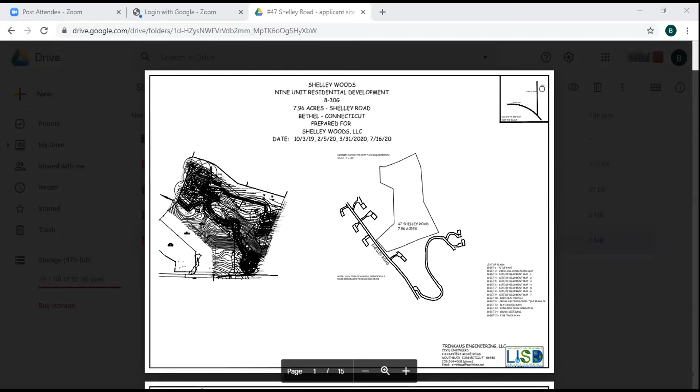Are these coming through on everyone's screen? Not yet. There we go. Okay, probably I would say, David, keep scrolling - I'll tell you when to stop. We just want the one that's really at the top of the hill, so keep going. That one you could stop at, this sheet. Okay, so just scroll down a little bit, David, or actually scroll up, so that the septic is at the bottom edge but the parking area is shown.

Okay, that's good. So the area that is Unit A is shown at the bottom left of the screen. Unit B is directly north of that, and then C and D are at the top of the page - you see half of building D.

So the 7,300 square feet of available area to turn around any type of vehicle, whether it's a fire truck, a UPS truck, or a garbage truck, is outside the parking spaces in front of the units and down to a line just at the upper edge of the dumpster across the driveway.

So dimensionally, from the front of building A, the parking island basically all the way over to the parking space in front of building D, which would be space number 16 on the plan, is 102 feet. If we go from building A to building C, which is in the upper left just off the page, that distance is 113 feet.

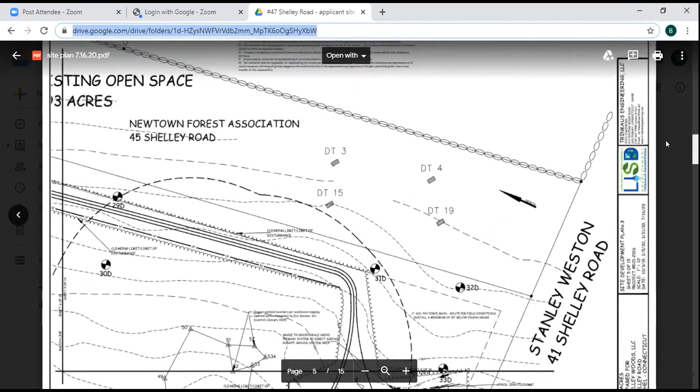We showed that we have at least 250 feet from that—so it was a field-measured sight distance, not a measured distance on a plan. Additionally, the traffic engineers say it should be measured 15 feet back because that's a DOT standard, but Shelley Road is not a DOT road. It's commonly used for residential driveways that we measure a 10-foot distance back from the edge of the travel lane, or if the road had a white line as a shoulder, you measure back not from the edge of pavement but from the edge of the traveled lane.

But again, Shelley Road has a 25 mile-per-hour speed limit, so 10 times the speed limit is 250 feet. They talk about using the 85th percentile speed—that would generally apply if you have traffic monitoring devices, and that's usually found on DOT roads where they count vehicles and speed. In many cases, the 85th percentile is higher than the posted limit.

I know on a site I had in Bridgewater on Route 67, the posted speed limit, I believe, is 45. The 85th percentile was actually 58 miles an hour, so the sight distance was based on 10 times that value. But here, again, we have a dead end road, we're almost at the dead end of it. 250 feet is more than adequate. And that's the minimum—you can actually see farther than that, but we demonstrated that we have the minimum sight distance as far as that goes.

Regarding Todd's comments, as I pointed out, the plans I submitted today have my signature and seal on a layer that plots. But I also want to point out for the record that I've recently reviewed two sets of plans done by Milone and MacBroom, one being a school and one being a large ground mounted solar array. In both cases, the existing conditions maps were not signed by either a surveyor or an engineer, and the site plans for these two jobs in the electronic filing were also not signed and sealed. So we provided that information, but I think it's important to point out that the reviewer's firm has not done that when they've submitted electronic files.

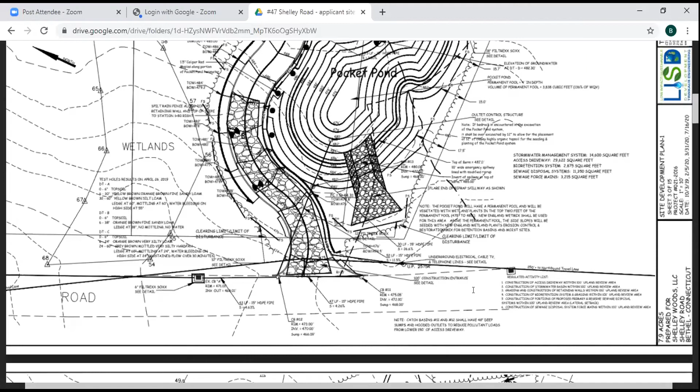He talks of the dumpster grade in front of the dumpster. The driveway grade is slightly over 6%—I measured it about 6.45. You probably want to go back to the same sheet we were on to start with, right there. The dumpster is right at the throat of where the driveway widens out. The dumpster pad is at the same elevation that the driveway would be. It is level, and a garbage truck would come up, turn around, be facing downhill.

A worker would get out, wheel the bin out. Now, dumpster bins don't have rubber tires, they have those heavy metal tires. Those do not roll very well. They're also rolling the dumpster out and then slightly turning it to face the garbage truck so it can pick it up and dump it in there. It is not going to roll down the hill over the length of a dumpster.

Steve, can I ask a question? Sure. This is Todd Ritchie with Milone and MacBroom for the record. I'm getting a little confused—you're saying that the dumpster is going to be rolled out, but you just said it doesn't roll very well. It doesn't roll freely; you have to push and/or pull the dumpsters out. And will this be pushed or pulled from a level dumpster pad onto a 6.5% slope? It would be likely. I'm not a garbage man, but it would likely.

That's pretty straightforward. You show it on your plan on a level dumpster pad, correct? Yes. And the slope in front of it is 6.5% going down the driveway, a cross slope of 6.5% in front of the dumpster pad. So if you're going to be rolling this out off the pad so it can be picked up by a garbage truck, aren't you rolling it onto a 6.5% slope? It is. Yes or no? I mean, yeah, you are, okay. Okay, you are, but it's not going to go anywhere. The dumpsters, quite honestly, are quite heavy and they don't roll freely.

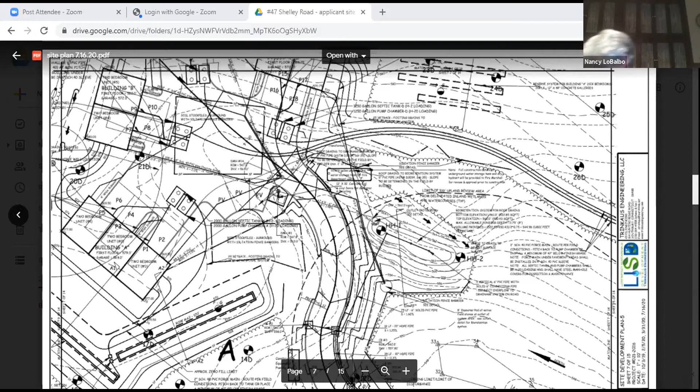I mean, these guys, the garbage companies, won't service a site that they think is unsafe. They won't let their drivers be subjected to potential injury. Fine. We will find a 6.5% slope somewhere in town, and we'll have them take a dumpster and roll it on the slope, and we'll see what happens.

As I say, I spent the afternoon with Phil Lepresti, who is very knowledgeable in this. I'll try to get that information for you, even though, quite honestly, the burden is on the town to show that that's a problem. We're talking about health and safety, and I'm not sure, it sounds like you're talking about the safety of the operator of the garbage truck.

No, actually, I'm talking about the safety of the people who are moving this. I'm talking about the safety of the people who are driving up the driveway. If this dumpster rolls down the driveway and hits a car.

Yep, it's pretty obvious to me that if you can't control something because it's on a slope, that's dangerous. And we should check with the Bethel police to see if they have any accident incidents, because they would have a report if something happened. So let's take a look at that.

Sure, but for you and Steve to engage in your discussion, neither of you, I assume, have actually worked on a garbage truck. I know that's what you like to say, but just like I can't calculate truckloads of material because I'm not experienced in construction, like I guess somebody else would be.

That again, you don't need to disparage me, Mr. Trinkaus. Thank you. No, excuse me, gentlemen, this is crazy. Let's just look at it from a very practical, common sense, layman's point of view.

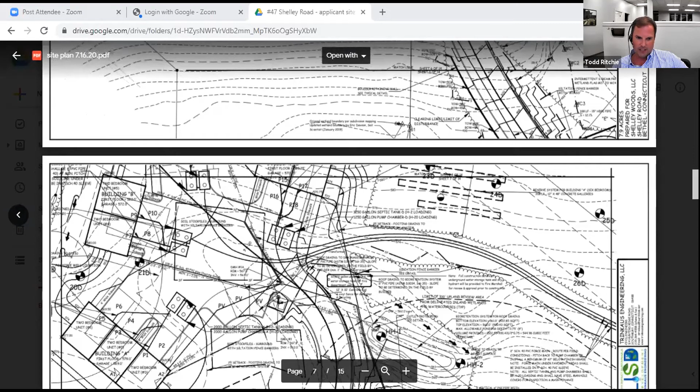The discharge will be onto the driveway. The flow from the swale will enter the driveway. Actually, it will go across the sidewalk for, what is it, unit... I can't read it. That's A, the P5, whatever the unit is for that, I just can't see it on the screen. So your flow, the swale discharges right near the well in that location.

Can we point out P5, please, David? It's hard to find. Unit one, thank you for zooming on Zoom. Sorry. And so the swale comes, discharges at basically the location of the well, and all that concentrated flow that will discharge from the swale at that location flows now towards what is labeled P6.

That's your grading, that's where it flows. That's concentrated flow, it doesn't go away, it doesn't dissipate. It's concentrated onto the driveway, onto the sidewalk. That's my point. Well, that's fine, you can make your point, I made my response. The high point to the swale is right at the edge of the page.

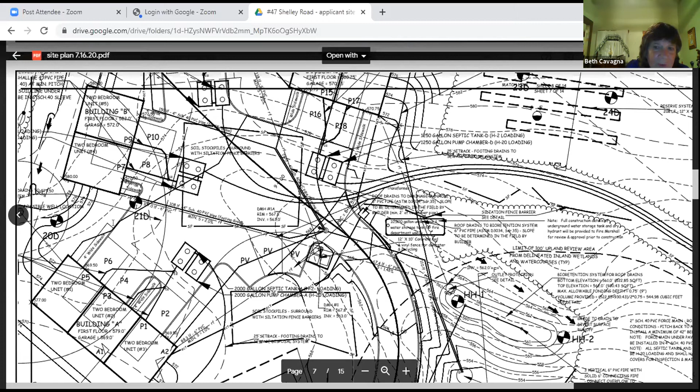Can you explain the high point? I just don't understand. The high point right above the 574 contour here, which comes off the end unit and comes around. Can you please point? Excuse me, Todd, David, could you point out what Steve just mentioned? Can you give Steve control so he can point? I don't have it on this, this is my laptop, Todd.

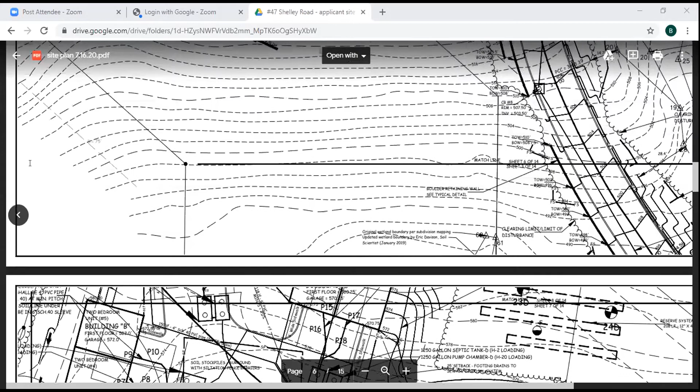So the 574 contour comes right off the side of the 2-bedroom unit where P5 is shown and heads towards the edge of the paper. The next sheet of the plan, you would see just off the edge of the paper, there is another 575 contour that directs the water the opposite direction. That is the high point, so there is virtually no drainage area at that point.

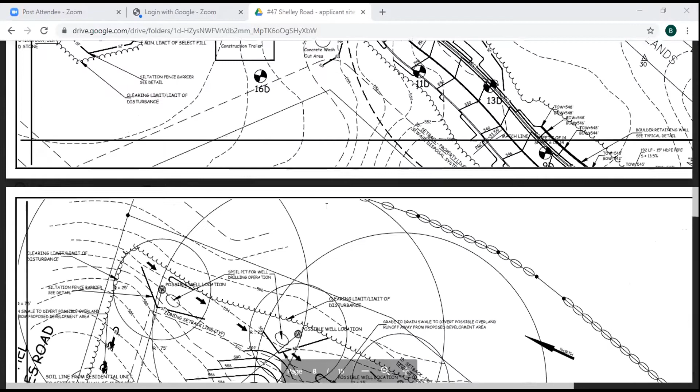I think, David, you want to go the other way? I think it's down. David, do you mind giving me control for a minute? Just so I can, it's just kind of, there's a disconnect here and I just kind of want to... Keep going, David, if you would. The next one. Okay.

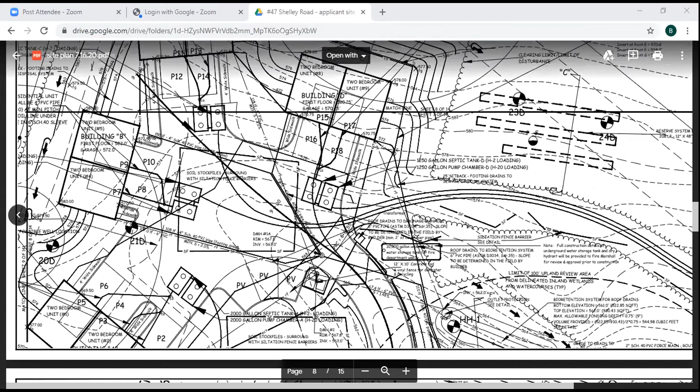Okay, I will gladly stop sharing my screen. If you have the plans available, it may make sense for you to bring them up on your own screen, so that way you can show with your own cursor what you're trying to point out to Mr. Trinkus. You can't just give me control on here? I unfortunately do not have that capability, it seems.

Now that we have this plan up, hopefully everybody can see the 574 contour that comes off the end of the building near P5, and it curls around and heads towards where P7 is. However, there's also a 575 contour that is behind Building A, and there's a very little spot right in between that creates a high point, because from there, between the two 575 contours, water to the right-hand side goes down towards the driveway.

Water to the left goes down towards the septic system. That is the high point. And that's my point—there is a very limited area of the water that would come down this way.

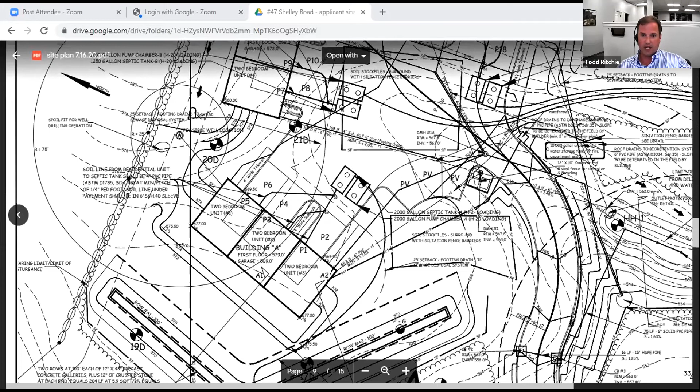I understand, I am following you. May I finish, Todd? I'm a little tired of you interrupting. Steve, I'm just saying I follow you. Fine, that's what I'm saying. Well, that's been on the plan from day one, so it shouldn't be an issue as far as that goes. I said I'm following you. I'm affirming the point you're making, I didn't want to cut you off.

There's no yard drain being proposed. The grading's staying as is. We can agree to disagree. That's the last comment I have on that particular point.

You had a comment. Well, we're here, Todd, what did you want to say? I don't think we're going to have any productive dialogue, so there's no point in me making any further comments. But your comment, I'm sorry, because of the back and forth.

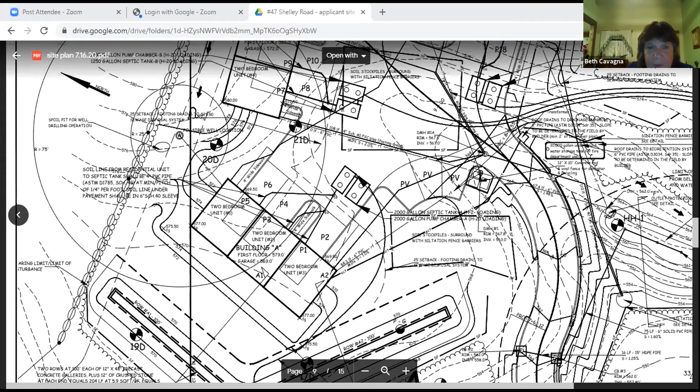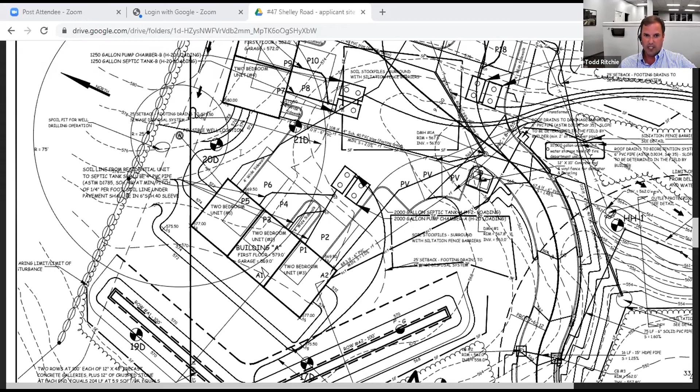The comment you made before, from what I see, is he's saying there's going to be concentrated flow going towards the septic system, which you also don't want to happen. From the swale, it either goes towards the septic system or onto the driveway, both of which you don't want. So I guess that's just my point. I'm not trying to make an argument here, I'm just trying to lay out the facts and have the commission understand what's happening.

We're moving on from that point. Your other comment was there was a section of the HDPE pipe shown curved following the curb line. You claim the manufacturer says it can't be deflected. The reality is, yes, it can be deflected—we've done this in the past—but on the plans I sent at the end of the day today, I made the pipe straight. So it's a moot point.

The spillway comment where I stated that dirt, as far as the berm, is on the front edge of the riprap spillway, is what I stand by. I have designed spillways since the early 80s, when detention became a requirement in Reading, which I believe was the first town in the state to require detention ponds, and we've never had an issue. The pond was also approved as part of the wetlands permit.

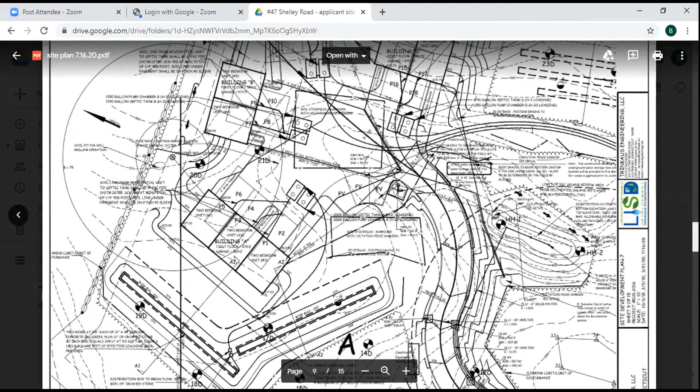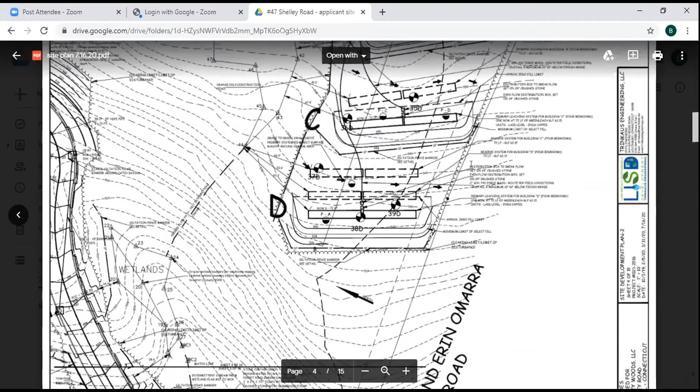Under the next comment, Milone and MacBroom comment number 19, he talks of the hydraulic grade line within the pond, saying it could push water laterally into the slopes as it rises above the low flow orifice. That is not going to occur, because the hydraulic grade line in the pond is the water surface elevation. Water knows how to do two things: it goes from an area of high energy to low energy, uphill or downhill. To push into the soil is a lot more resistance to flow. So as the water rises in the pocket pond, it does not push laterally into the slopes, because that is not the path of least resistance—it will go to the outlet. As stated on this plan and previously, if bedrock is encountered, we're over-excavating the rock and putting in a clay fill to compact and seal off the ledge rock. So this will not infiltrate, because it's a permanent pool in a pocket pond.

I assume with your guardrail comment number 21, you're talking about the left-hand side of the driveway on top of the retaining wall—I don't believe it was stated which side. There's a 5-foot shoulder before we get to the wall, so we're not going to put a guardrail there. There's no evidence submitted that driving up this driveway at 5 to 10 miles an hour is a safety issue. If the commission chooses to require a guardrail from station 1+75 to 2+50, fine, we'll put it in, but there is no need for one in my professional opinion.

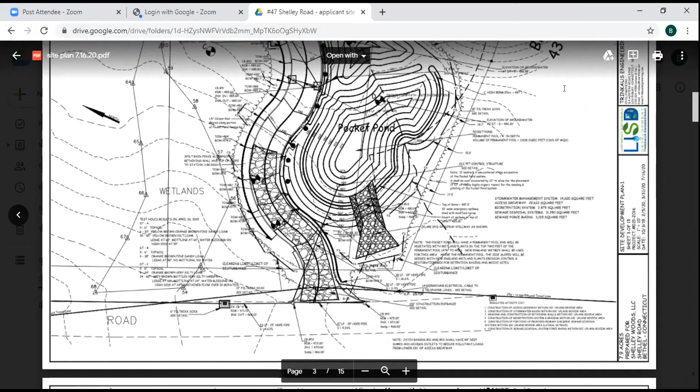Number 23 of Todd's letter was about mailboxes. There's no requirement in the regs to show mailboxes at the bottom of the hill. Likely, based on other projects Tim has done, there's a mailbox up at the units for all the units, so the postal carrier goes up the driveway and delivers the mail. But again, there's no requirement to show that.

Also, there's no requirement for a directional arrow. There would likely be a sign saying addresses 100 to 109, Shelley Road, all even numbers or all odd, somewhere at the bottom of the hill so the fire department knows where it is. The right-of-way line to Shelley Road is approximately 19 feet off the edge of the pavement, so whether the sign goes within the right-of-way beyond the sight line or within the property, there are plenty of locations for it. But again, that's not a public health or safety issue, and there's no requirement.

He also requested a stop bar and stop sign. Again, this is a driveway, not a road. None of the 8-30g projects we've done in Bethel — 49 Taylor Avenue or 91 Worcester — which have more units than here, have either a stop sign or stop bar. If you put it on this driveway, then I'd suspect you should put it on every other driveway in the town of Bethel.

He asked about design speed for the driveway. There is no standard for design speed for a driveway. I actually Googled this and looked for resources to see if I could find anything, and there was nothing. Again, it's a common sense approach — most people probably drive 5 to 10 miles an hour up and down their driveways. That's the reality, and there's no reason to suspect this would be any different.

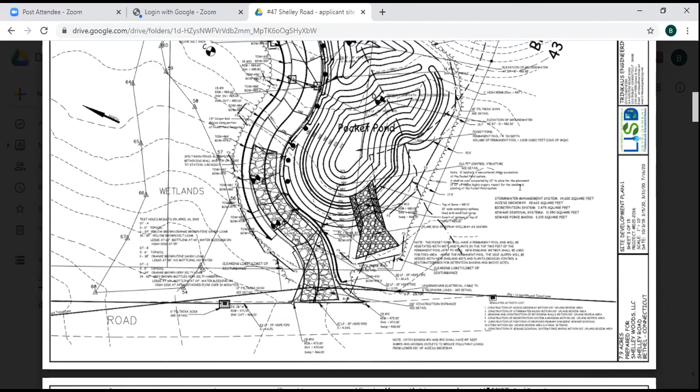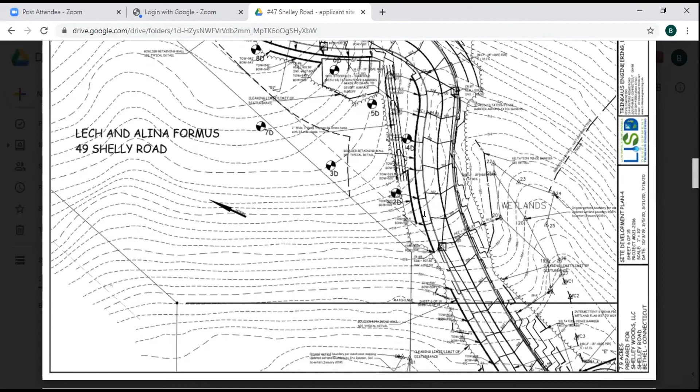Again, they asked for the centerline radius, as I pointed out in prior responses regarding the fire department. The critical curve is about halfway up. David, if you'd go back up the driveway — yeah, keep going — right there. If you scroll up a little, that curve there on the inside radius, toward the bottom of the page, is 36 feet.

For the fire truck, it requires a 22.5-foot radius, so we're 13.5 feet bigger than necessary for the emergency vehicle to go up and down the hill. The centerline radius is meaningless and not a public health or safety issue. The geometry meets the International Fire Code, which is the controlling document here for the movement of emergency vehicles up and down the driveway.

Under comment number 30, which I have to go back to, about the sight line — I already discussed that, how it was measured in the field. That's covered in my revision letter of 9/29 under the traffic engineer's comments. Again, school buses will not go up the driveway; the kids will be driven down or walk down to the bus. Years ago, this was very common.

This was an occurrence where I lived in Reading — we lived up a dead-end road, and all of us walked down the hill to the main road with the other neighborhood kids. We probably had 30 kids at a singular bus stop. I know that's not what kids do today; they generally get driven up and down their driveways by mom or dad. Again, no guardrail is necessary in my professional opinion. If the commission wants us to put one between 175 and 250 on the left-hand side of the road, at the top of the retaining wall, we can do that, but it's clearly not needed, nor is the current plan unsafe in any form or fashion.

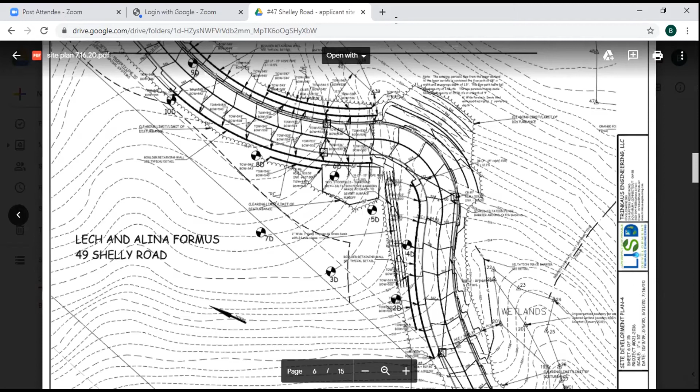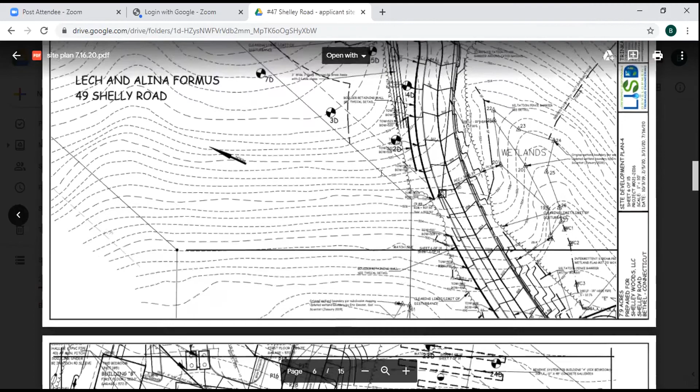I was just looking through here and they were looking for turning templates. I provided one at the bottom of the hill to show how the fire truck can come off Shelley Road into the site. David, the other way, back to the pond one — they were looking for the largest vehicle and whether they're delivery trucks.

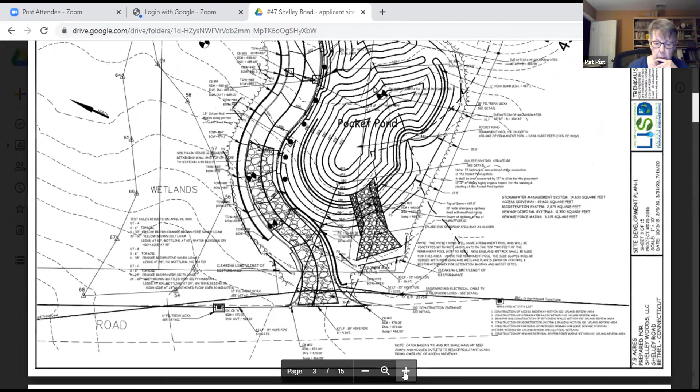The aerial truck is bigger than delivery trucks. And as I said previously in my response to the fire marshal, that one curve I showed you is the only curve anywhere close to the minimum radii. You don't need a track movement of a driveway for vehicles. You look at the limiting factor, which isn't really limiting here because it exceeds the minimum requirements. So showing the turning templates on the plan doesn't show anything.

Any vehicle, the fire truck, a UPS truck, an oil truck, a garbage truck, can go up this driveway with no problem on the geometry being proposed. It is in no way unsafe. Quite honestly, a singular driveway in Bethel that's only 12 foot wide is not necessarily under these curve limitations. We made this to conform to the International Fire Code under 8-30G, which is a higher standard than you'd have in any town for residential driveways.

Because I did notice what they're saying is they had concerns for motorists traveling down the driveway toward Shelley, that this motorist in certain locations will not have pavement area to maneuver around an emergency vehicle. Do you disagree with that? An emergency vehicle traveling at a normally higher rate of speed.

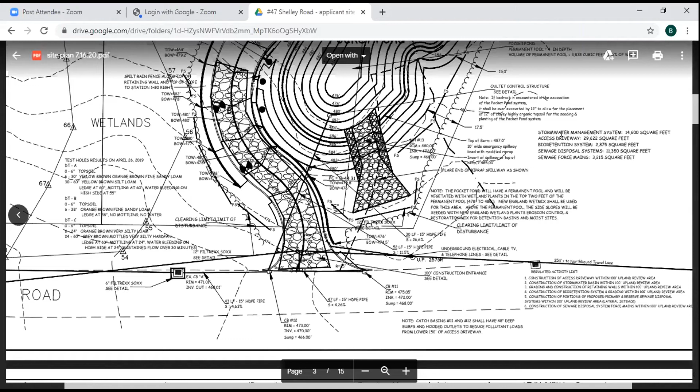So then you're disagreeing with the Frederick Clark letter. Yes, I am. I've designed many 8-30G developments with this type of standard, and we have not had any issue with people coming in or out with other larger vehicles going in the opposite direction.

Okay. Beth, did you want to say something?

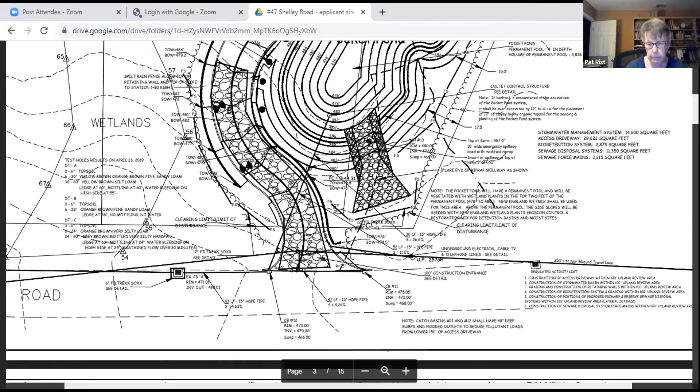Well, if you're on that topic, let's stick to it for a few minutes. The fire marshal, Tom Galliford, is the emergency manager coordinator and has a lot of expertise in safety. I'm looking at one of his memos, and he's asking - we've requested the approach angle information to determine if the fire apparatus can safely enter off of Shelley Road onto the proposed access road, and this information was not provided.

It's provided on the plans which were sent to you late this afternoon, Beth. Okay, thank you. Also, his issues are pretty consistent, and he's been asking for them since the end of June.

Along those same lines, the commission and myself are thinking, is he being unreasonable asking for this type of information? Because we were getting the sense from the applicant that, hey, I'm doing this, I put it on the plan, here it is. And Tom is asking for a separate layer showing the complete turning radius and vehicle movements from Shelley to the proposed units. This should also be provided on a clean layer to provide a clear plan view.

That prompted us to take it a step further, and everybody's got the memo regarding getting the traffic experts in here, because the traffic experts are the ones who will help us make a final determination: is this safe? So we did. And maybe Mr. Trinkaus wants to go into this a little more too, but we'll deal with that part of it later.

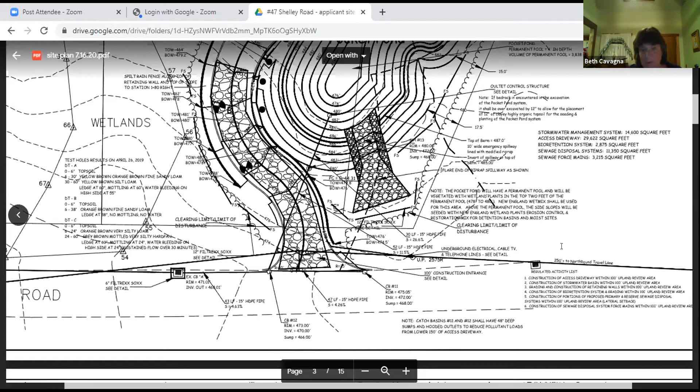And Todd, I'm going to ask you to pipe in if I'm incorrect. Go up to the right, the sharpest corner, David, if you can. And I think that's something like 15. Right there, up that sheet, David.

So, I mean, yes, our zoning regulations state specifically the maximum grade of a driveway is 12%. It's not average grade, it's the maximum grade. It's a driveway, 12 foot paved, 12%.

But let me address that. I recall you saying, Steve, you talked about a crown - is the 12% that the crown? Well, crowns are in roads, they're not in driveways.

With all due respect, Beth - please, go ahead - you're incorrect. A driveway or a road is designed on a center line basis. That's how it is designed, that's how it is measured. This goes back to the early days of what was termed route surveying, back into the 1940s. The design is the center line of the road. Obviously, on any curve, the outside of the curve is flatter than the design grade, and the inside of the curve is slightly steeper than the design grade. That's simply how it works.

But if this was a road, which it is not, and it was constructed, an as-built was done, they're measuring the center line of the grade, and that determines compliance with the design. Not the edges, not the inside of the curve - it is the center line. So I know Todd disagrees with me on this point, but this is the design basis, and it's been this way for years and years. And that's how it is. It is the center line. That's the grade that's measured. Your regulations do not say it's the edge, it's the center line, but the center line from a design standpoint is the controlling grade for any type of horizontal geometry and vertical geometry.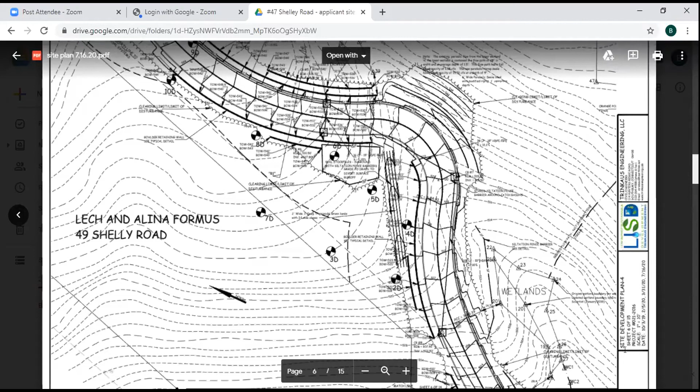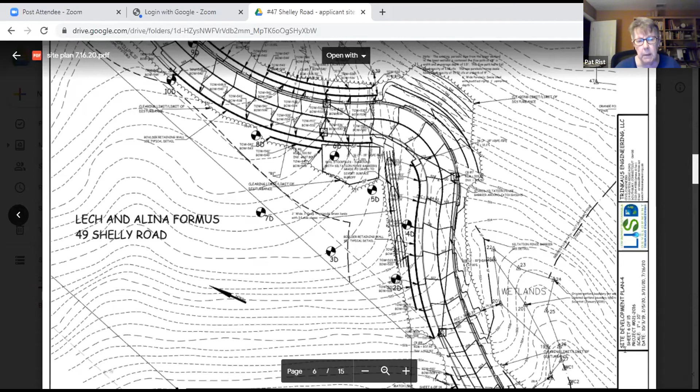So going up or down this driveway, wherever you have an inside curve, as Steve said, you're going to have more - it's not a little bit less or more, it's going from 12% to over 16% in this case. You could call it a little bit more, but it's also in the wheel path coming down a 12% driveway, and coming around a 90-degree curve, almost a reverse curve, it's very sharp. So that's something to consider.

If you're talking about the town regulations and not exceeding 12%, well, you could also say that not exceeding 12% means don't exceed 12%. Yeah, anywhere - that's how I've looked at it. I mean, there's no center line criteria of a driveway, because typically, in my experience, for a typical residential driveway that's maybe less than 100 feet long or whatever, you just show the limits of it and you show the grade lines. You're not providing a profile of it.

But because this is an 800, 900 foot long driveway up a pretty significant slope, and it's going to have two-way traffic and multiple units, obviously you have to design a more robust roadway to access it. You could call it a driveway, but as I've said previously, you call it what you want, it's designed as a road. It's got commercial catch basins, it's got a crown, it's got gutter lines, it's got everything that a road would have, except safety devices such as guide rails.

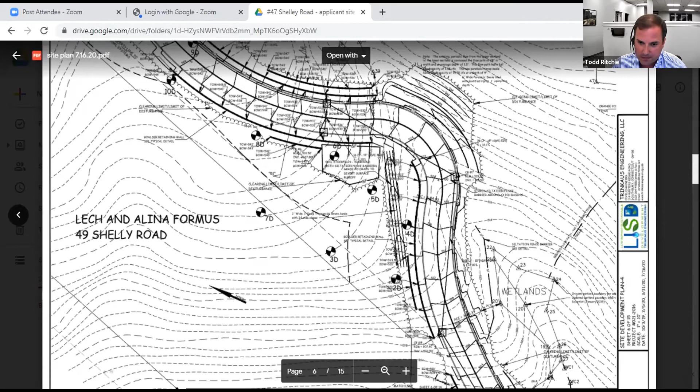In regards to, Steve made a reference to 91 and 49 Taylor Avenue as far as stop bars and stop signs. You're basically talking about flat areas. In one instance, the driveway is very flat going in. In the other instance, you're going directly into a parking lot. Here we're talking over at least a 700 foot long road access way, and in particular some of the grades leading down to the roadway with a stop bar and a stop sign. I don't think that's unreasonable to ask for.

But at the same time, I think we will leave it to the experts that have determined these items in the past. The commission has used Frederick Clark Associates to help with guiding safety issues and traffic issues. So I think Mike Galante will be able to put a lot of that to bed once the information he needs is received, and we will make arrangements to ensure he receives that information.

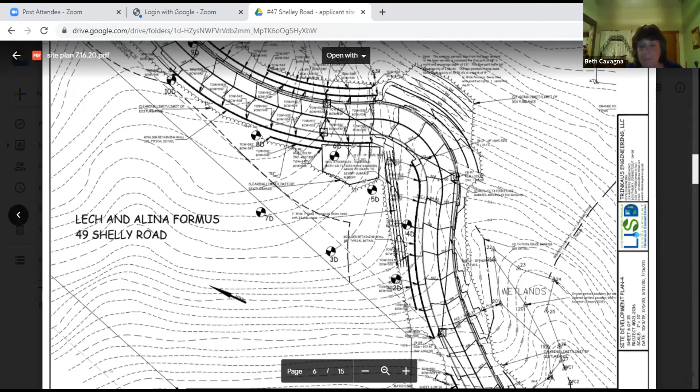So moving on a bit more in regards to the site plan, I just want to talk about the easement area. I believe Todd mentioned it in his engineering report. We've mentioned, I agree with Todd, that it would be nice if you just show us where the easement is. It's very simple, it can be pulled from the survey map that's there, include it.

At this time I note for the record that we have a letter from the Newtown Forest Association dated September 16, 2020, as far as the easement area and the uses of that easement area. I would request our council look at that and address their concerns. They're requesting that the stormwater management plan should not encroach into the easement area. I think that's difficult to determine when you don't have the easement area clearly defined on the site plan. So I would ask that be corrected.

Also, in regards to the health department, or let's just go back to the site development plans again. I'm sorry. It's been clearly stated that the plans are difficult to read.

I just want to note for the record, although the majority of an email sent by the applicant was in regards to another application, there was a reference here to one of the commission members talking about squiggly lines and not being able to read the plans. I just want to clarify where that probably was coming from, because I think it was one of the newer members of the commission that might have mentioned that. I want to note it's not an unreasonable request to ask for a legend, to ask for things to be shown with symbols and definitions on the map.

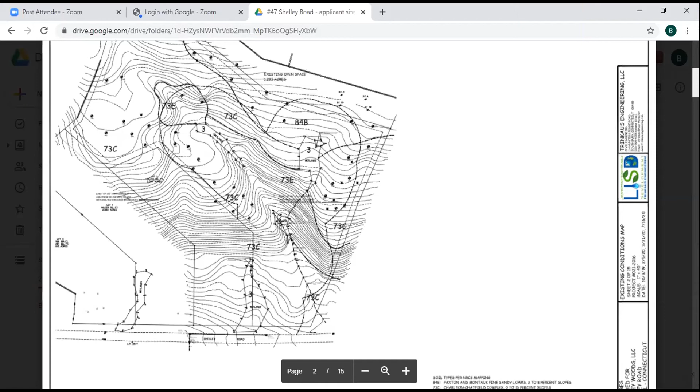Is that something you can do? In writing, in the September 29th letter submitted at the end of the day today, I did respond to their points. To everything in the Frederick Clark September 8th letter? Many of those actually were previously brought up by Todd in earlier memos in front of this commission, to some degree or another.

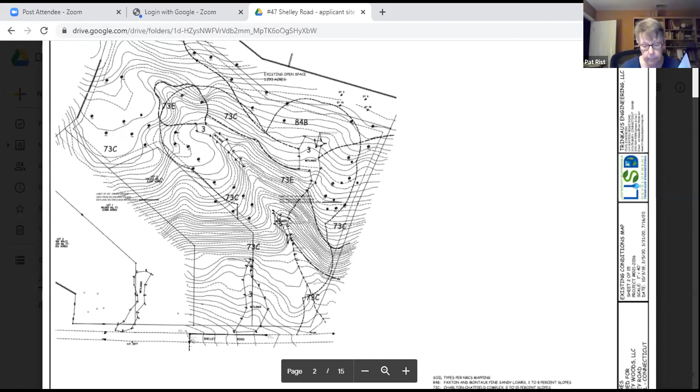Okay, then we'll take a look at that. And then if there are some things that appear not to be answered, then we'll just come back and request a response to them. That would be fair. Thank you.

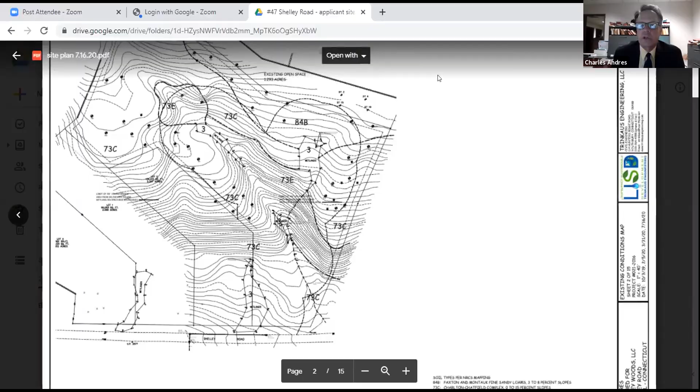So, Chuck Andres, attorney for the commission. Madam Chair, I had a question for Mr. Trinkaus. Yes. Mr. Trinkaus, I'm just to make clear, because we're probably going to continue the public hearing, that you submitted some plans today.

I originally thought the only difference was that these were signed, but you mentioned a couple of times during your presentation that you made a few other additions. I don't know if you changed the date, but they still have the same July 16th date on them. Perhaps you can summarize the changes - I thought there was a curve, a pipe that was deflected, and you mentioned something about providing templates on one of the plans. The commission doesn't have these revisions, so can you summarize what's been submitted today?

Very simple, Attorney Andres. The pipe that was shown parallel to the curb line on a curve has now been made straight between the two catch basins. This doesn't change the hydraulics or anything else. And then we provided the fire truck turning template from Shelley Road turning into the access driveway, shown on the fire truck plan, which is the last sheet of the plan set. Those were the only two changes.

Going back to the comment Beth made about the easement shown on the earlier set of plans - it's 25 feet in width, parallel to the southern boundary of the site from Shelley Road up to the open space. If you look at the plans, there's a very steep rocky slope in the middle which is hazardous to go up and down. But the easement is 25 feet, and the proposed pond, while some grading beyond the berm is within the easement area, does not compromise or reduce pedestrian access because those areas will simply be vegetated and be a little more open than they currently are.

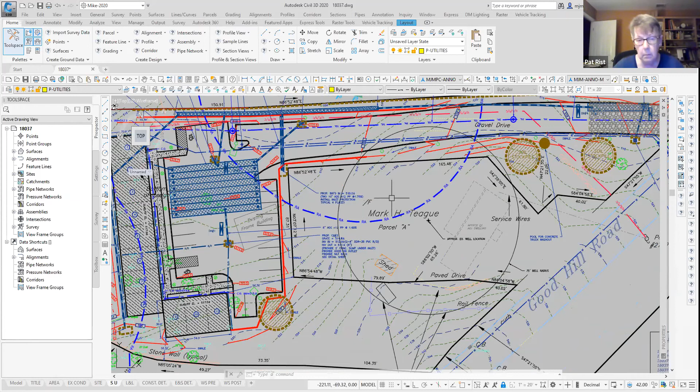The area they were talking about for landscaping was this area here. There was a comment by one of the commissioners about changing to arborvitaes, and that's something we'll take a look at.

There was also a request by staff for a hydrodynamic oil water separator, and we feel that for a project of this nature, which is residential, it's really not warranted. If it was a retail development, drive-through, or industrial use, it might be justified, but this type of development is very low risk for contaminants.

We do have sumps on the catch basins, which we separated from the system. Originally we had them over the top of the galleries; they're now separated with oil hoods, so we do have some protection. In my professional opinion, that's satisfactory to address the potential for a car leaking some oil.

When a car comes in, they park and shut the engine off. Usually you find a lot of problems with drive-throughs or retail where people come in with their engine still running for maybe 5 minutes. You can see oil strips on any drive-throughs at banking centers or Dunkin' Donuts, things like that.

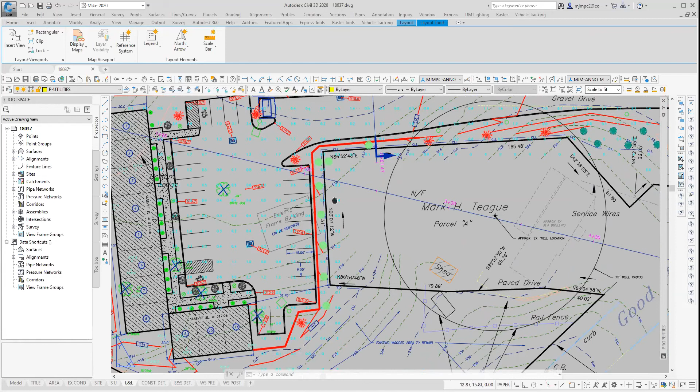There was also a question about the drainage pipe under the building. As I've stated, pipes under buildings occur all the time via plumbing, vent lines, and water lines. Drainage lines are not as common, but in commercial work they're more common than residential. I worked on a project recently in Danbury where we had to get drainage from the back of the building to the detention system in front, and the only way to do it, because the grade dropped off, was to run a pipe through the building similar to this.

So we can take a look at some other options. If there's a real concern, you could put concrete on the sides and top just to protect it, or go with a little heavier pipe.

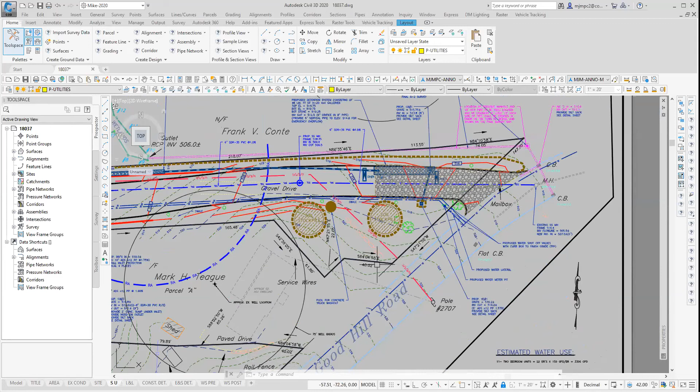There was also a concern about the soil stockpiles we had in the front. We're going to take them off the plan when we revise it, and just move them to the back of the site or take them off entirely. Most of the site is being filled, as I mentioned, so more material will be brought in, dumped, and spread immediately. After everything is done, they'll bring in topsoil, seed, and hay. But the demand for large stockpile areas is not needed.

There was also a comment about a play area. We did have one initially in the back, behind units 3, 4, and 5, but it was recommended by the environmental consultant, because of the vernal pool in this area, to not have any light or audio noise there. So we took the playground off. The applicant is also concerned about liability with a playscape, especially in a remote area, so I don't know what can become of that.

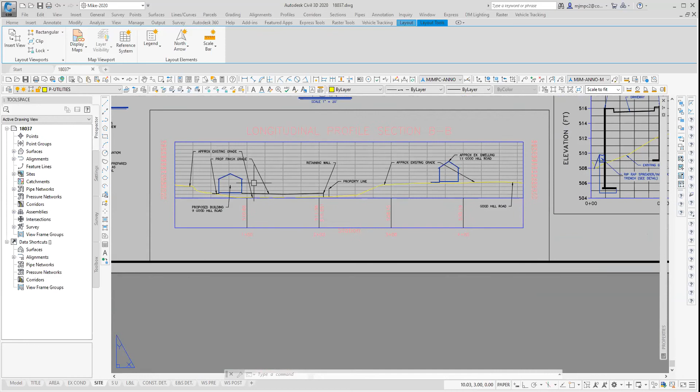And I know there was also talk about, we did provide the profile going across. I'll show you that line is section BB, which goes through here out to Good Hill Road. And that is shown here, and I put in the approximate building height and the building height for the house.

At 11 Good Hill, there was a request to do another one for the other property, but I can just tell you by the topography, just go to the watershed because it shows more of the topography off-site. You can see the grade jumps up severely in this area where this house, which is 13 Good Hill, but if you look at that grade, you're at around 552 in this area here. And the top of our buildings are around 542. So you're almost 10 feet over at the base of their house to above the peak of the roofs for this development.

So we didn't provide another profile through there. It just didn't seem like it made any sense because of the severity of the grade.

And then the only other thing I had was we tried to do a site walk that time, and it was requested to do some clearing in there. I'm just hoping that maybe we can schedule a site walk and the applicant can trim back or cut down and make it accessible so we can get that done. And then the only other question, I know there was some balloons that had been requested, I just would like to know how many.

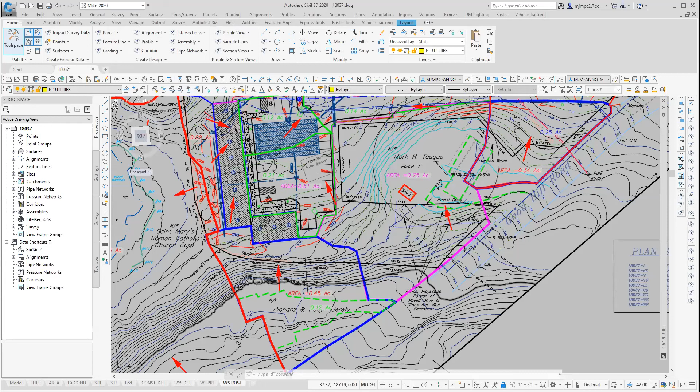Mike, I think you covered the ones that we had open from the last meeting. And again, I'm looking at the memorandum from Wright Pierce on July 27th. And I think that we've addressed a lot of what's in that memo, it was just commenting on changes that we'd already addressed. That's correct. At this point, unless the commission has questions, we have really very little more to add to the application.

So we'll not belabor the evening if there's nothing else to be discussed.

It's Pat. I just would like to make a couple of comments. Yes, we want to do a site walk. We need the area mowed. So when that can happen, we can give you a date to set up a site walk and just have that area mowed for us when we come out there, that it's done.

Hey, Pat, have we determined that the Inland Wetlands Commission is not going to have a problem with that? Because I was at the meeting when they told us until you get permits to work on the site, don't do anything, don't touch it literally.

Well, I think, Neil, if you want to continue to belabor this, I'd be more than happy to continue to do it. But if you look at the memo I wrote in regards to the site walk and all that other nonsense we're trying to accomplish here in regards to the email that was sent to us by the applicant, I think we covered pretty much what we're asking for, what we want done.

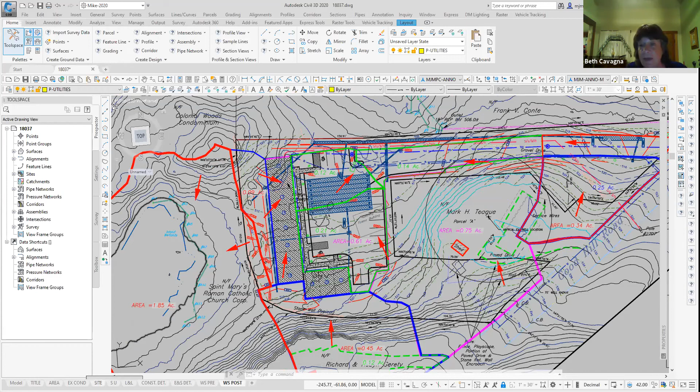And in regards to the Inland Wetlands Commission, I attended most of those meetings. And with the Inland Wetlands Commission telling them, David, maybe you can mention this also, there was an illegal activity that took place on the property. It was the deposition of fill. And I'm sure the Inland Wetlands Commission was very firm when they were talking to the applicant after that happened. They were more than firm.

Correct. And Beth, I'm happy to weigh in on this if I may. I'm just saying, the only thing I'm asking you to do, David, is to just say yes or no. Is it an issue with the Inland Wetlands Commission for them to clear a path to get to the certain stakes that they wish to go to on the property.

That's all I'm asking. Dave McCollum, the wetlands agent, there would be no issue for the purposes of navigating the site for the property to be mowed or what have you for the commission to traverse the property.

Thank you. So that being said, Mike Mizuko speaking, would it be possible to schedule the site walk this weekend and have the applicant clear a path and have maybe Beth go out, look at it, make sure it's okay before we do the site walk?

And if there's any adjustments that need to be made, they can be noted. We can take care of it so everybody is happy at the time that we do the site walk, or have it scheduled.

So we can complete it at the time we go out there so we don't waste everybody's time. I'll go out this weekend at some point, look at it, and just verify there's a clear path for them to walk from the street to the points they asked you to stake last time. I assume the stakes are still in there, right? Right, I assume so, yes.

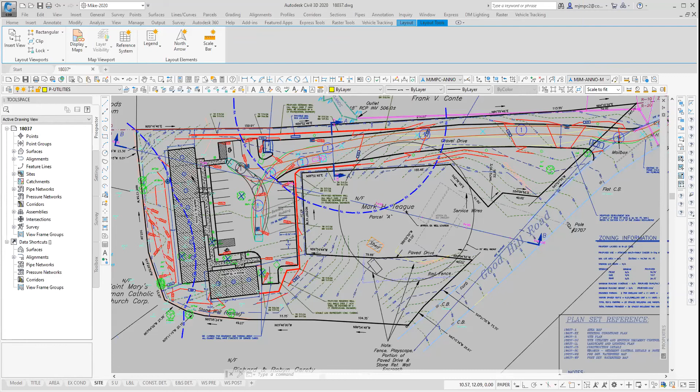Let me zoom in here, just to depict the end of unit 11, because that's the closest one to the house. And then also maybe down in the middle of this row, somewhere between 4 and 5. Yeah, I think that's good. That's fine, all right, perfect.

Okay Michael, when it's cleared - I mean it's going to rain tonight, it's going to rain tomorrow. Yep. So that leaves us what, Thursday or Friday? We'll get it done. Just call or email me, like we do with other projects, tell me it's done, I'll come by and take a quick look. Beautiful, okay, thank you. You're welcome, sounds good, all right.

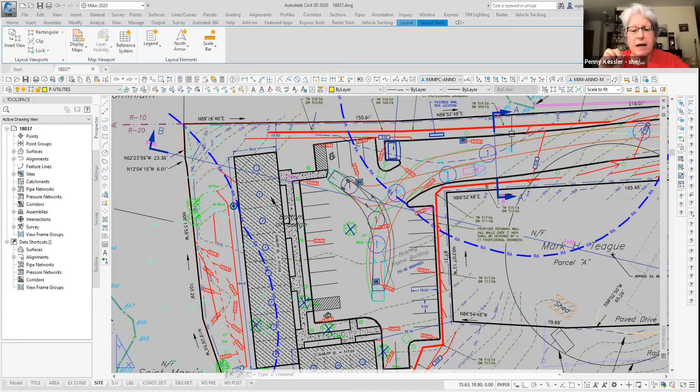I'm at 17 Good Hill Road. I just wanted to know if neighbors were allowed to go on this site walk. You can attend the site walk, but there'll be no interaction between commission members and the public attending.

Next, I see Kristen Gerety. Hello, this is Kristen Gerety for the record. I live at 12 Good Hill Road.

I brought up conducting a traffic study at the June 30th P&Z meeting, which is important infrastructure reporting necessary for understanding the Good Hill neighborhood traffic patterns. This should be indicative of regular pre-COVID traffic patterns versus today's COVID traffic patterns. Other towns, such as Fairfield, have required developers to provide a study like this for the town's consideration. For example, I'm referring to the Beach Road Fairfield proposed 8-30G development that's in front of their town commission right now. The Bethel P&Z Commission should have this study information available to review for their decision making.

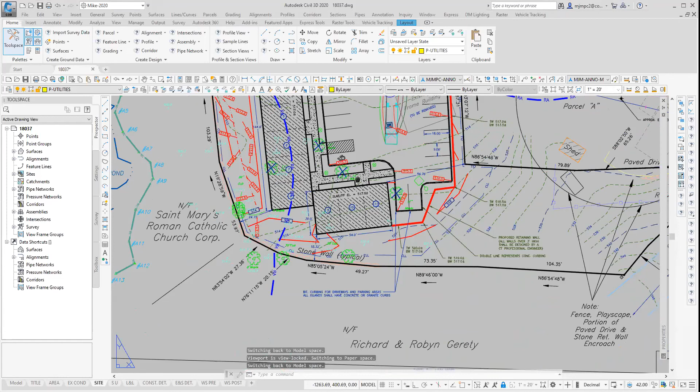One is the blasting, and we've talked about this quite a bit. As I said, most of this site is being filled. If you look at the one area where there's some rock outcrop in this corner, you can see that the existing grade is 516 at the corner of the building, and it's dropping. Our slab elevation's at 517, so we're a foot above that.

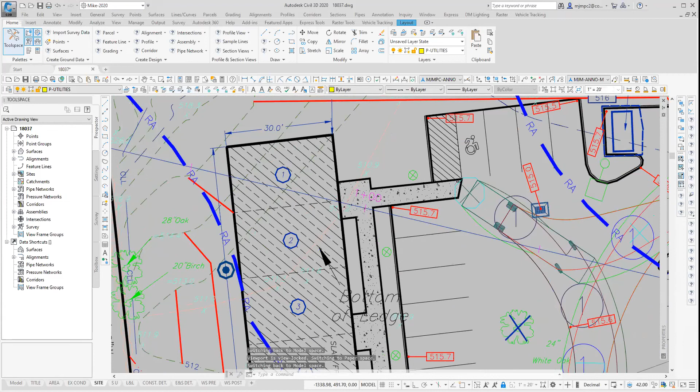The only other place is units 1, 2, and 3. We're excavating roughly 2 to 3 feet along the back wall. This is the only area that we're doing any cutting for the buildings.

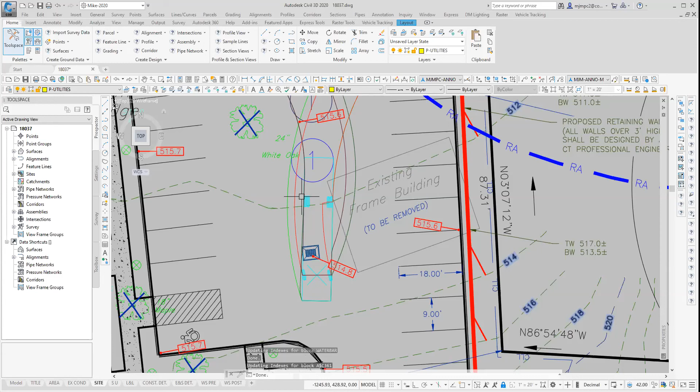Then the only other area, because all of this stuff is being elevated, you can see that this contour right here, this elevation is 512. And we're at, in the middle of the parking lot, 515. Oh, I lost my— oh, there we go. Lost my movement there for a bit.

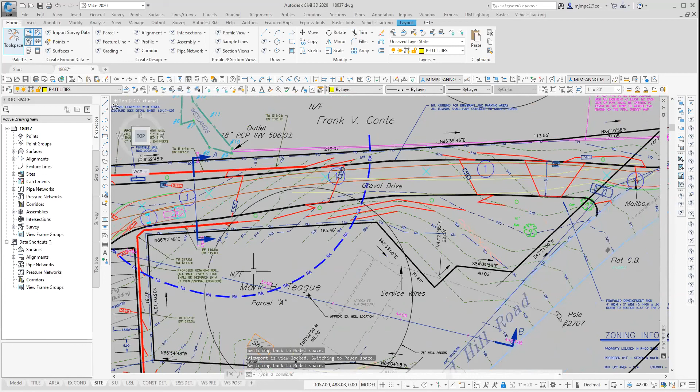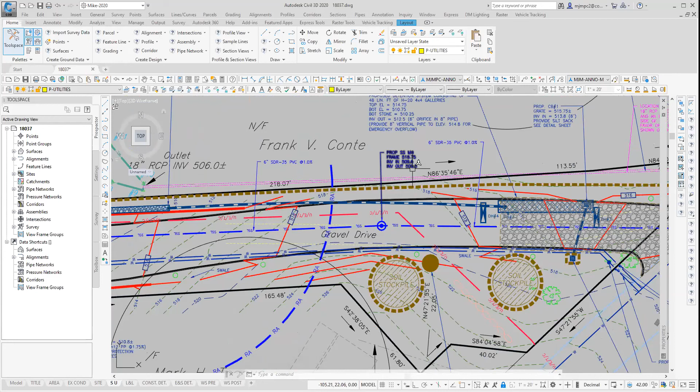As I mentioned, the only other area we have any deep excavation—let me just go to the site utilities plan—is just this area here where there's a high point for the driveway grade and the sewer line has to run through there. But we have a test hole here that we're 7 feet deep, which is just about the elevation of the invert of the pipe. So we don't expect blasting. If we have to do a little bit of rock removal, it might be with a hammer. We are not expecting any blasting.

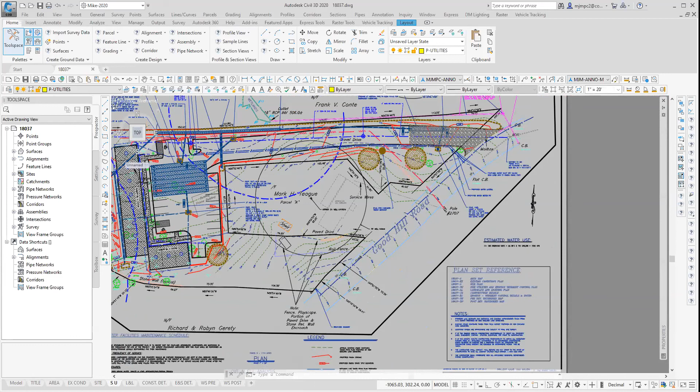With regard to the water line, we did meet with Public Utilities, and it was my understanding that the installation of the water line would have to extend across the entire frontage of the site. Because it wraps around number 11, we extended the water line up to the edge of our property line and proposed the hydrant there. Again, it was my understanding from the meeting that that improvement would be paid for by the developer. I know, Neil, some other towns look at assessing who benefits from it, but it was my understanding that would be paid for by the developer.

To the site, yes, yeah. The question that was raised, Mike, was who's going to bring it up the hill? Oh, beyond that—then I'm not even sure how to answer that question, but I understand what you're saying, as far as if everybody gets together and then everybody gets an assessment for it.

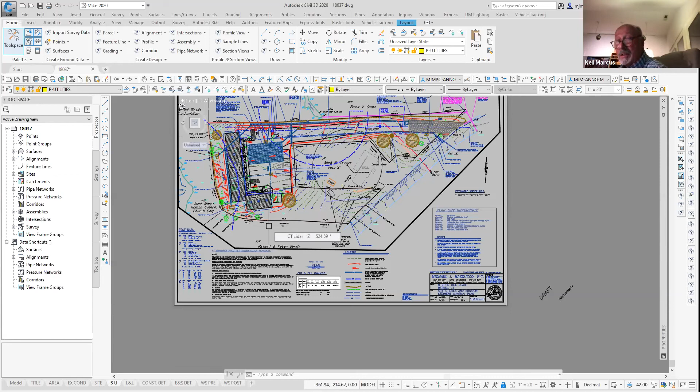And Mike, I'm glad you clarified a little bit more on the blasting issue, because years ago I represented Costa Sturgeon and Tom King, who built a lot of Good Hill, particularly when they were building houses up on top of the hill. I got to tell you, there was a lot of rock up there. No question, whoever the neighbors spoke about—but that was at the top of the hill, and basically, as Mike has indicated, we're at the bottom, talking more about filling than cutting. So, right, that's the big thing—there is a massive amount of rock up on top of the hill, and if you're cutting into it, then yeah, you have blasting to deal with.

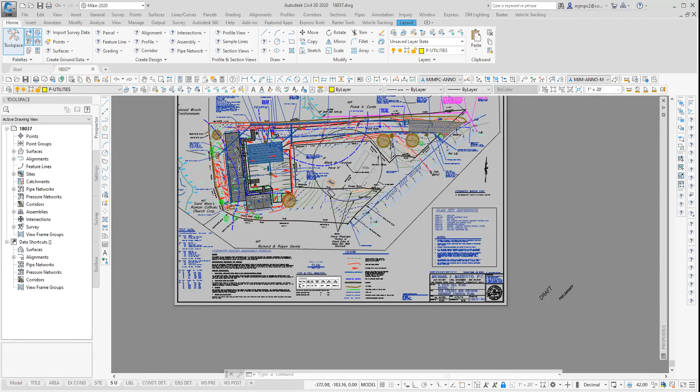So that was it, and then the only other thing with regard to Rich's comment about the balloon—we're planning to put a balloon right at the end of unit 11, at the center line of the peak of the roof, which would be closest to 13 Good Hill Road. So that's all I had to say.

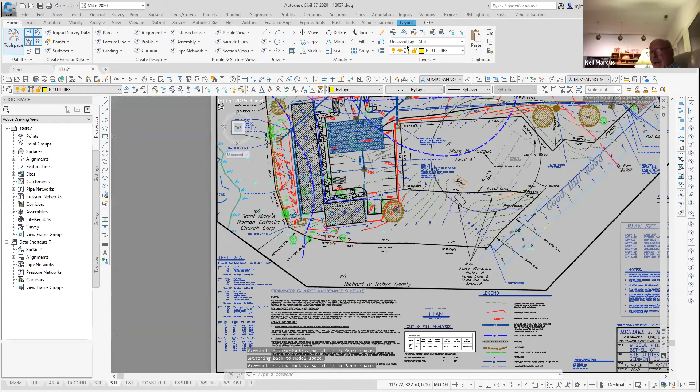Thank you. Where the applicant has responded, and if there are no other questions, we're done.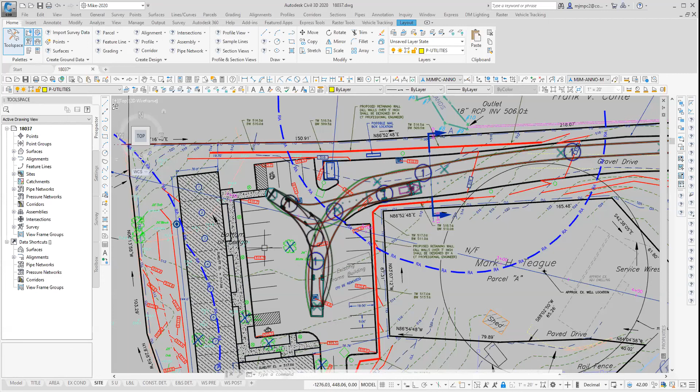There was a comment about fire truck and emergency vehicle access. I just want to point out that the parking area has the turning movements here for the aerial fire truck. It would come in, there's a 3-point turn to back in and then pull back out. But at the same time, you can see the separation distance between these parking areas is quite wide. Normally, for dual parking on both sides of an aisle, we would have 24 feet in between. We almost have double that, just to allow for emergency vehicles to come in, stack in, move around, and effectively fight a fire with the proper amount of equipment. That's part of the reason why we did that.